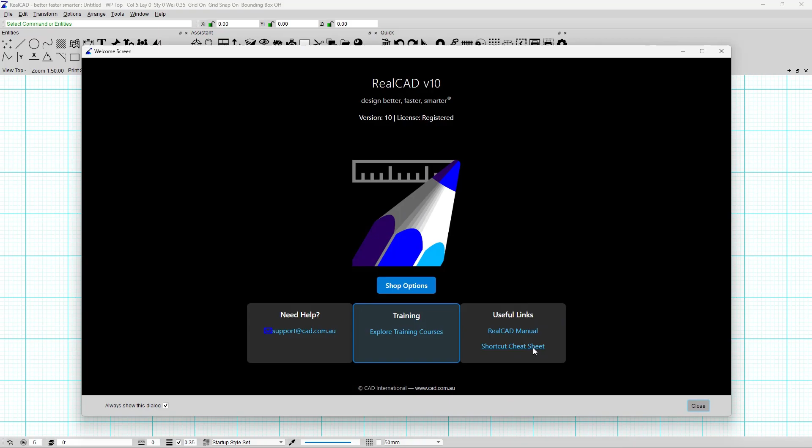Let's close this one and we'll open the full version of RealCAD here. When we do, we still get the same splash screen, the same manual and shortcut cheat sheet options, but we now have more menu items to choose from.

The menu down the left-hand side is now across the top, and we have what are called the parent and child menu systems. For instance, if I wish to draw circles, I select from the parent row across the top the circle commands, and underneath in the child row I have all of the ways I can activate or draw circles.

The same would be true for curves, for hatch patterns and planes, and for text. Exactly the same idea behind each one: click on the parent, it activates the child row underneath for you to select your chosen command from. And with all of these, the menus are grouped.

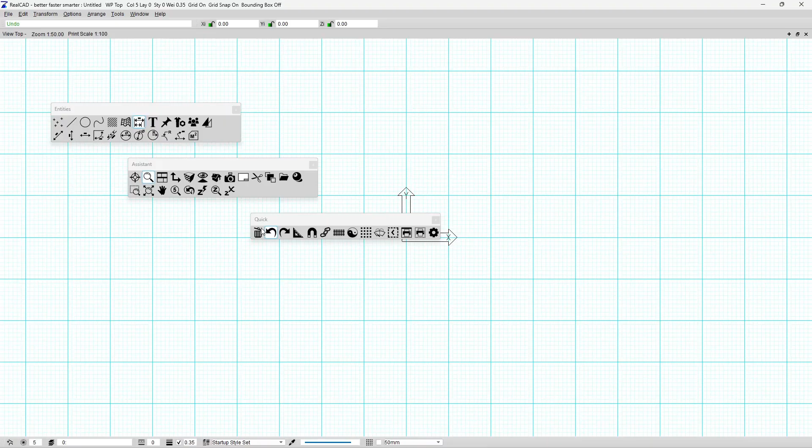There is the entities menu, there is the assistant menu, and there is the quick menu. All of these can be relocated, if desired, into a new location on the screen.

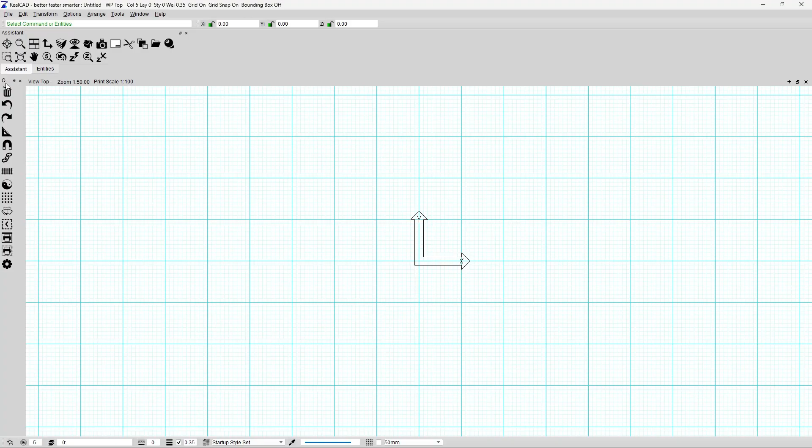You can also stack them. For instance, I could place my entities menu at the top, let go, grab hold of my assistant and lay it on top, and so long as it's sitting nicely on top, it will layer itself over the top there. And then I'll choose this item and put it on top. We now have the quick menu, the assistant menu, and the entities menu all in the same location.

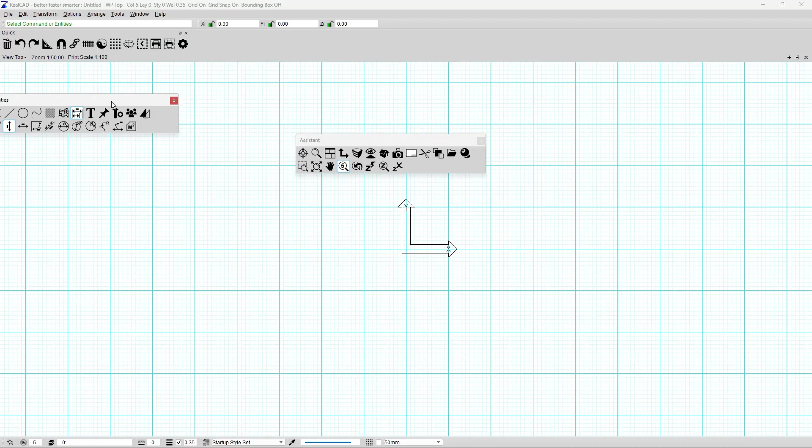We do, however, recommend that these be separated, and perhaps the way they come out of the box is the best way to operate them. So we'll put the entities menu right back on the left-hand side here, and I'll take the assistant menu and push it in between the two, and that is how it comes out of the box.

You will also notice at the bottom is our defaults menu. This menu allows you to see what your current color is, your current layer, your current line style, and your current line thickness is set up to be.

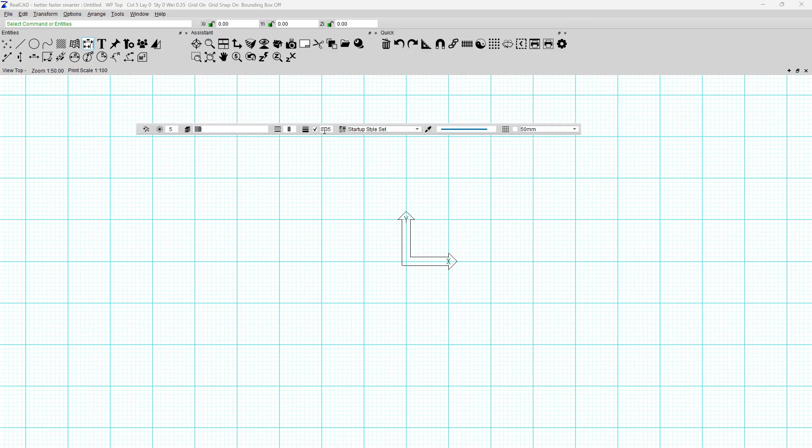It also is able to be maneuvered into a new location, so it could be sitting at the top here, as it is with the LT version of the software, or as we typically recommend, it can sit back down in the lower portion of your screen.

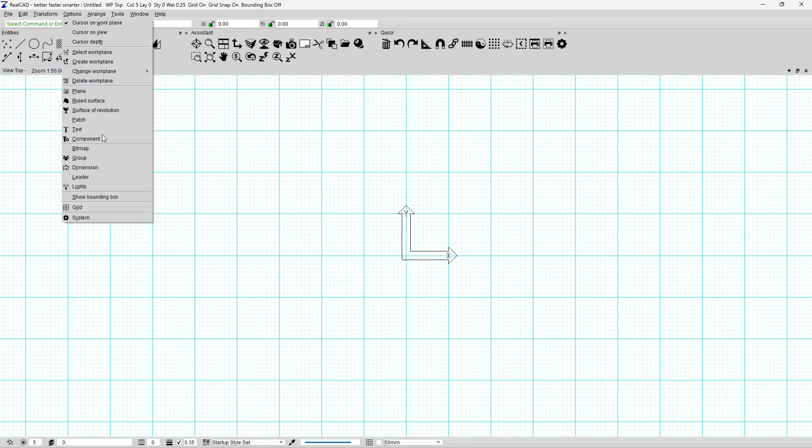In addition to the icon menus, you also have the text menus that drop down. Some of the commands that are not available in the icon menus are available in these menus, and some commands, for instance the arrange commands, are available in both.

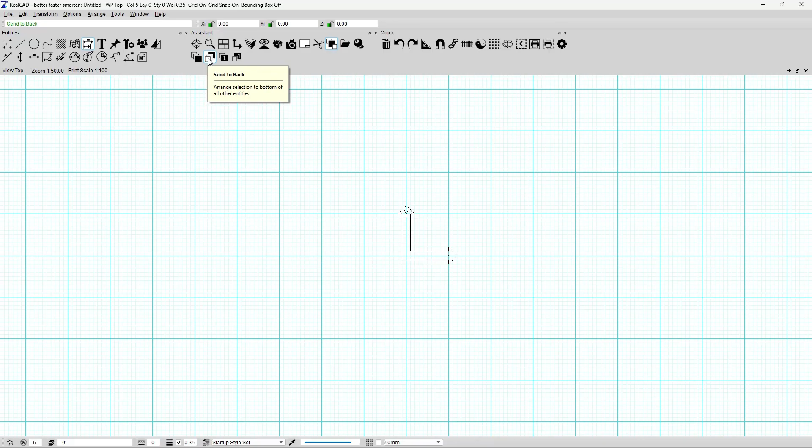You will see arrange to front, to back, forward one, back one, and you'll see exactly the same set of four commands under this icon here: to the front, to the back, forward one, and back one.

At the very top of your screen, you'll notice it shows you the application name, the catchphrase for that application, and the name of the current open file. You can only have a single file open at any one time, and this is the file name. If it says untitled, then no file has been saved.

It also displays the status of the work plane, which is the XY indicator here. It also shows us the status of which color, what layer, what line style, and what line weight are currently active, and those items are also shown just down here: color 5, layer 0, style 0, and a 0.35 line weight.

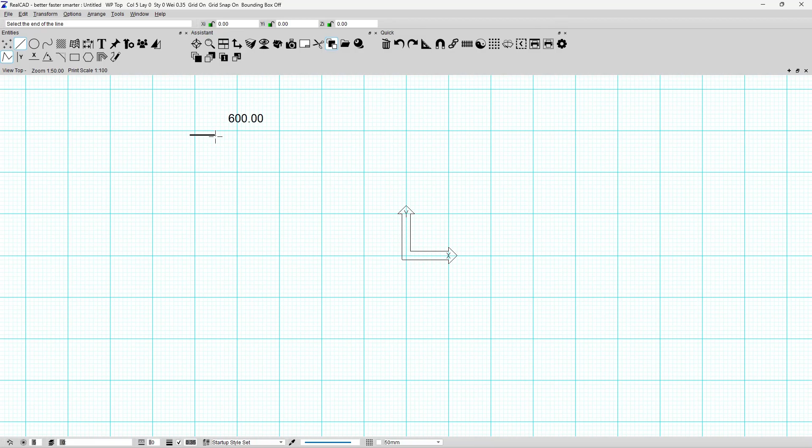It also displays whether the grid is on and whether snapping to the grid is also on. You can see here that the grid is on, and if we were to draw, you would be able to see that it is snapping to the grid points as we move around the screen.

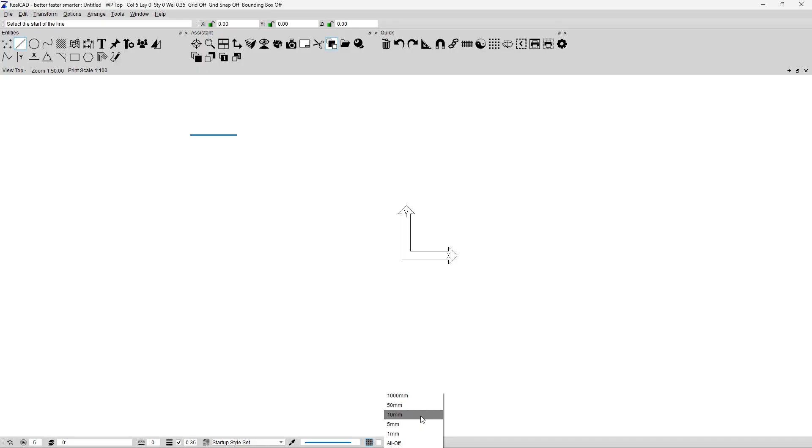You can switch the grid on or off using the grid tools in the quick menu. This is where you switch the grid snapping off, switch the display of the grid off, and select OK. The same option is available at the bottom menu, which opens the same dialog box. Both allow you to select a preset for your grid, and choosing that preset instantly switches on the size, color, and style of grid you wish to operate under.

Right here is one of the most important areas of your software, known as the prompt. It too can be moved. It basically tells you what the software is expecting you to do, and especially as a beginner, by looking here you'll be able to determine what you should probably be doing next.

Normally this prompt area sits at the top left, and it changes as you work through the software. So as I'm hovering over the circle, for instance, it's telling me I'd be selecting circles, arcs, and ellipses.

If I'm hovering over the curve command, it shows me that it's going to be selecting curves, and so on. Once I've selected a command, such as insert a line, it prompts me at the top.

It says select the start of the line, so I choose to select the start of the line. Then at each stage, it tells me what the next expectation is, and here it says select the end of the line, which I do.

It keeps asking me to select the end of the line. Eventually, when I've finished doing what I want to do, I right mouse click to step back once, but it's still expecting me to continue drawing lines.

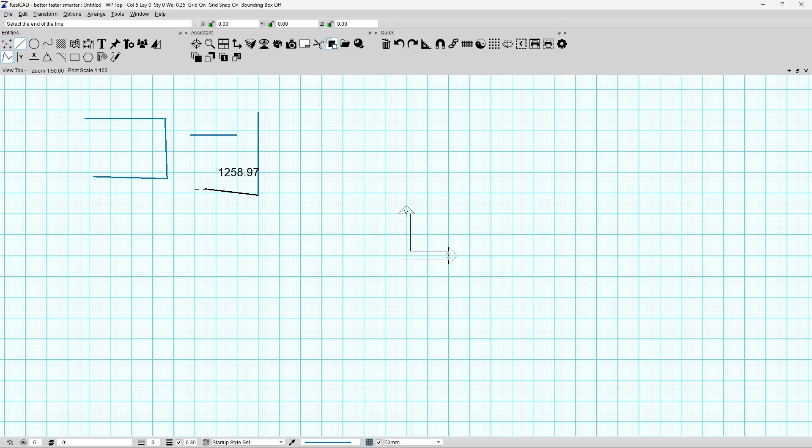If I right click twice, once and then again, the prompt will change color and go green, and it will basically say you have no commands selected at this point.

It says please select a command or select some entities. So keep an eye on this. This is probably your best friend when you are learning to use the software.

To the right is the coordinates bar. Again, it's a separate floatable, dockable menu, where you enter values in the X direction, left and right, the Y direction, up and down, and if you're working in 3D, the Z direction, which would be towards you or further away from you.

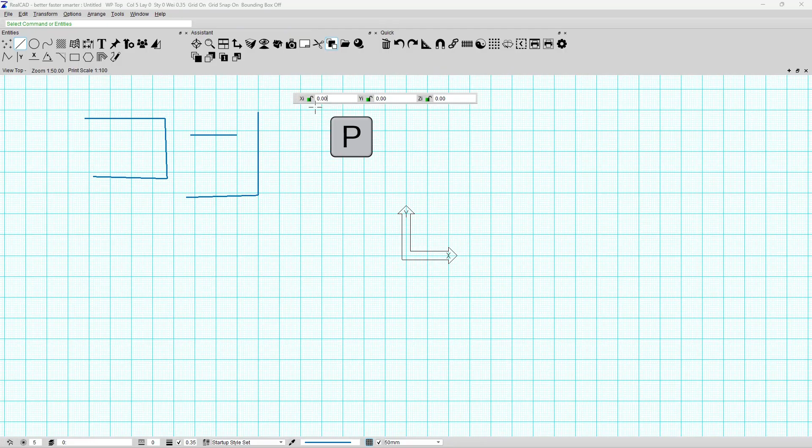Items such as the padlock can be clicked on and locked into position, locking the value you've typed in, or unlocked. Simply pressing P on the keyboard also locks or unlocks. If we were in the Y coordinate section and I pressed P again, it would lock or unlock whatever value I had typed in there, and so on.

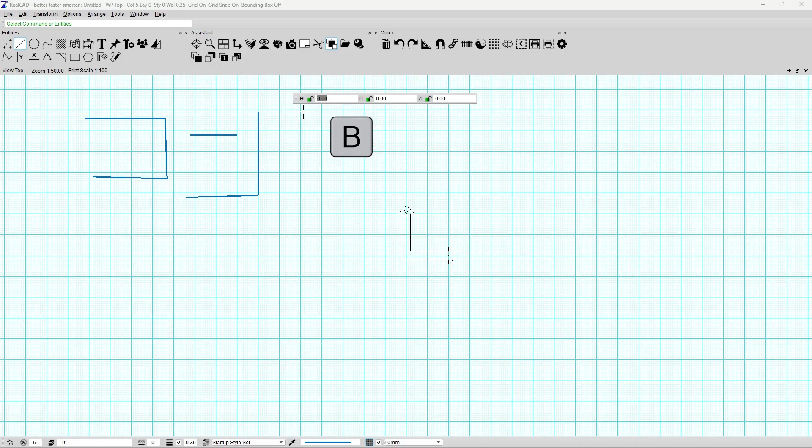You'll note that this menu also changes. Should I wish to be drawing in bearing and length, I simply press B on my keyboard, and this changes from the X, Y, and Z values to the B for bearing and L for length option.

If I select A for angle, it gives me both distance and angle as an option. And if I use the slash key on my keyboard, the slash option allows me to actually type in a length value whilst I'm drawing.

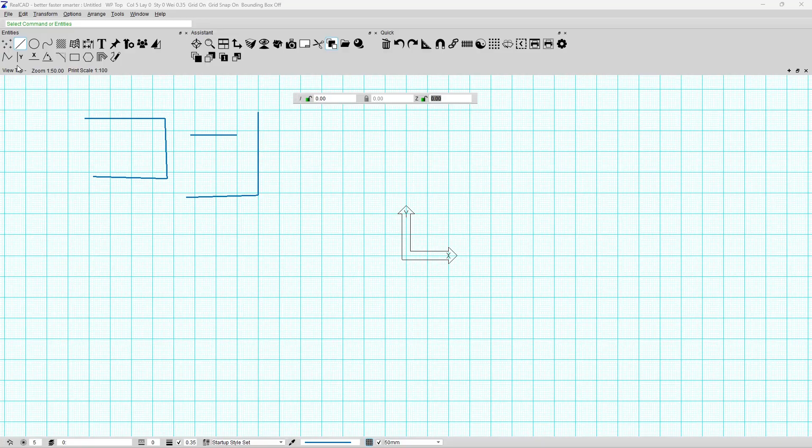So should I be clicking here and here, I can hit the slash, enter in a value, let's say 500, and then as I'm drawing, that line is locked to being only 500 long, no matter where I go.

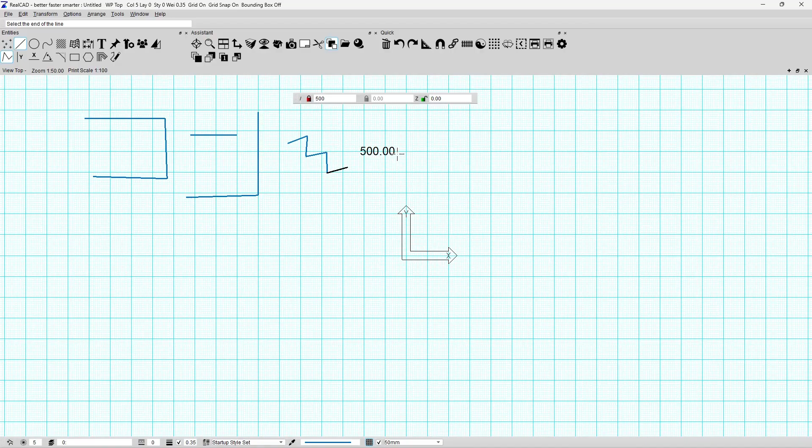So you can see the menus are important, and knowing where items are will be one of the greatest challenges over a period of time, because there are a lot of commands to choose from. Not all of them that you will use.

However, it's an excellent idea to become as familiar as possible with as many menu items as you can. I've just pressed P there in order to unlock that particular option.

Down the bottom, for some of these menus, a dialog box may appear. For instance, if I select the color wheel on the Change General Properties menu, another menu appears allowing me to select and change and edit the color scheme that I'm using.

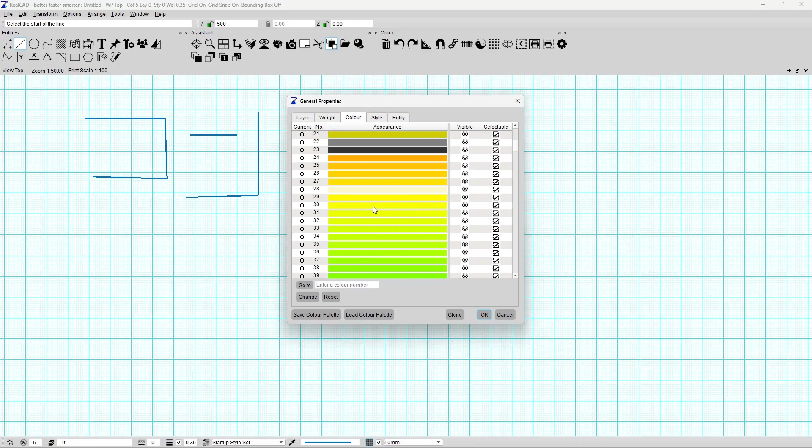I can also choose line styles, line thicknesses or weights, and layers. This is all done within the one dialog box, but it can be selected by choosing any one of these icons here. General Properties opens up the weights, but the others are still available to you.

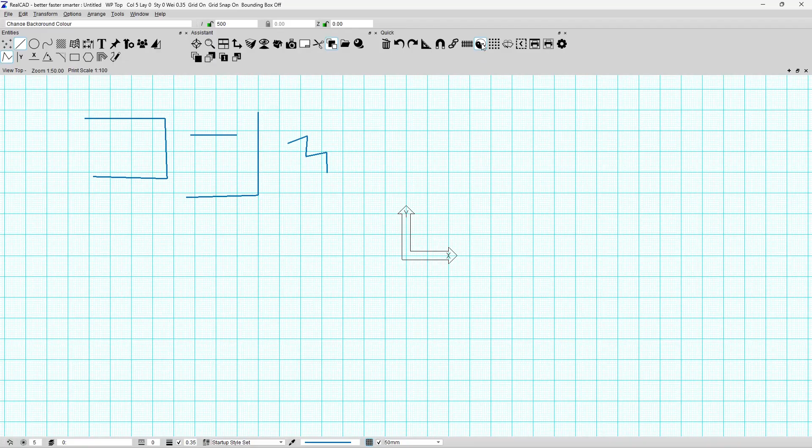The background color can be whatever color you choose. To change it, select the Yin Yang option, which is basically the change background color icon. From here, you can choose one of three tabs. You can either grab a color from anywhere on this palette to become your background, or choose a black and white series.

If you go completely black and hit apply, it will show you what it looks like. With this particular colored grid, it's not very easy to see the line work, so be careful about which colors you choose. Most people choose white or a very light color because it's most similar to a piece of paper on which your drawing may eventually be printed. Traditionally, however, black was the preferred background because it was easier on the eye and it allowed most colors to appear vivid when used.

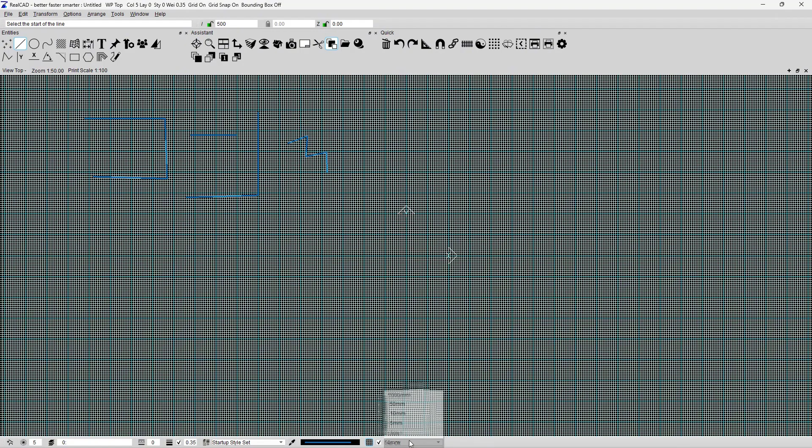So if we choose black and then switch the grid off, you can see that these colors look simply bright and easy to read. But as I mentioned before, it's easier to recognize how it's going to print by picking perhaps the pale gray or white and applying that instead.

The work plane indicates what's called the absolute 0 point. Absolute 0 starts where the X and Y come together. Let's try drawing a line again, and you'll notice my cursor has changed very slightly from being just a crosshair to having a round circle. If I then click at that location, I know for a fact that I have landed at the absolute 0 point.

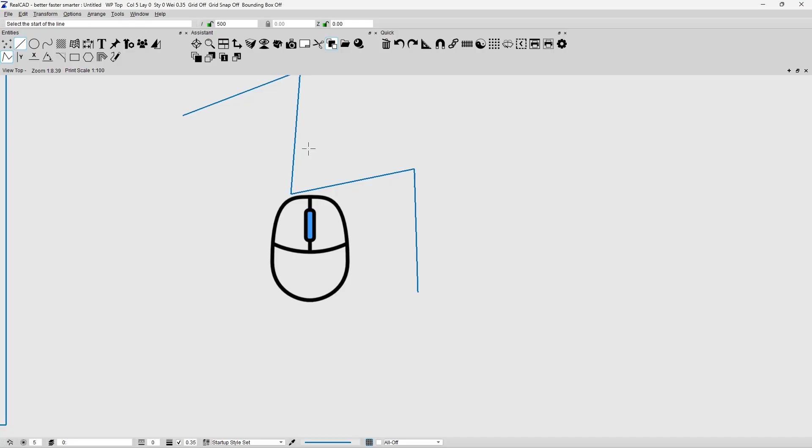Zooming works based on where your mouse cursor happens to be. So if I want to zoom in on these wiggly lines, I should place my cursor close to them and roll my mouse wheel either towards me or away from me in order to zoom out or in.

If I wish to move the entire screen to the left, I press down on my mouse wheel and drag the whole screen across to the left. If I wish it to go to the right, I just drag my mouse to the right, and so on. If I let go of the depression on the mouse wheel button, then I'm moving my cursor independent of the scene on which I'm drawing.

You can change a variety of settings using the settings tool here, under the system options. This is where you could, for instance, if you find it difficult to zoom in and out with the roll of the mouse because it's going the wrong direction for you, click this option to reverse the mouse wheel for zooming. I do recommend, if you're operating under version 10 or later, that you check this option, and you also potentially check this option, but we will explore that in a future video.

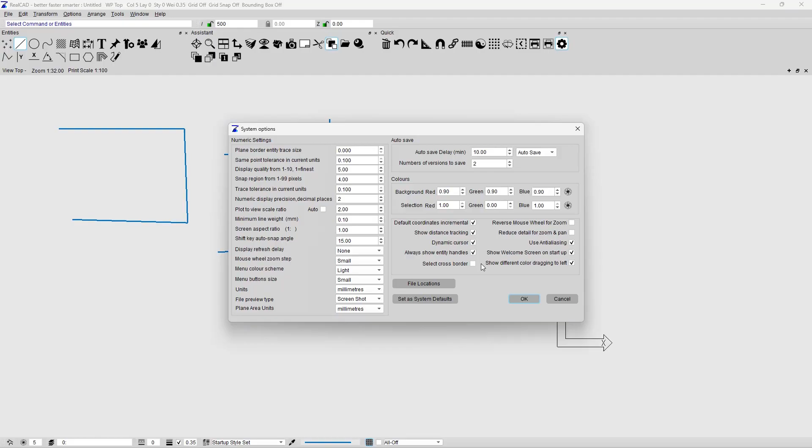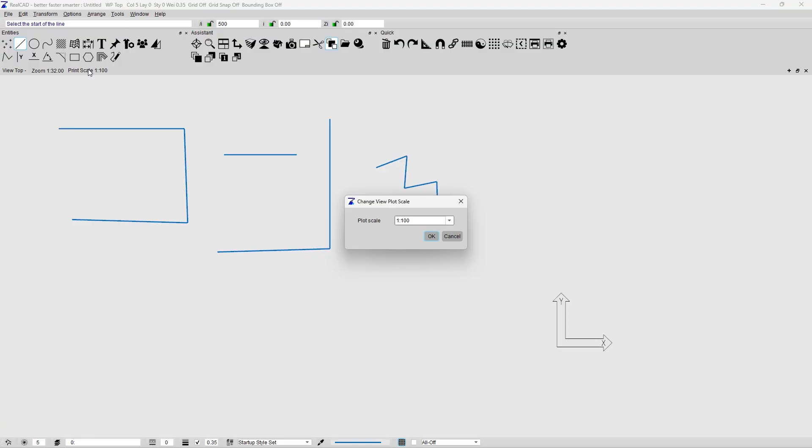In addition to what we've already seen as part of our menu system for the graphical user interface, we also have some discrete buttons here. This not only displays what the current scale is set to, but if I select it, it allows me to actually change the print or plot scale. I can use a drop-down menu to choose what I want to turn it to, or I can actually type a value in, and so on.

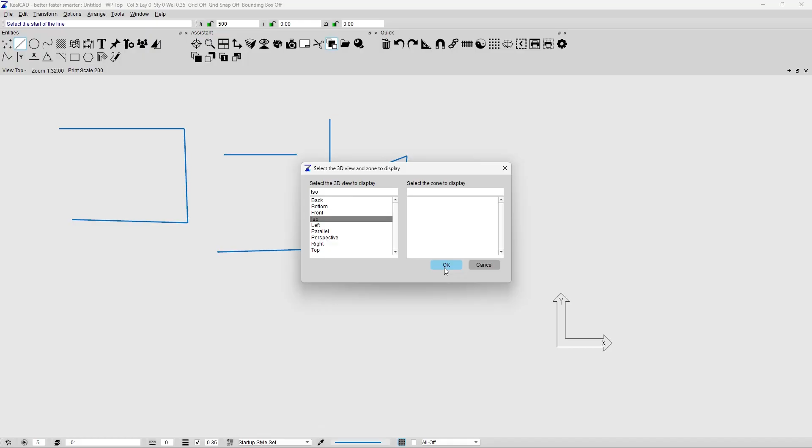I can also choose a different view. So here I'm in the top view, and if I select it, I could, for instance, select an isometric view, and you are now looking at exactly the same information, but from a different viewpoint.

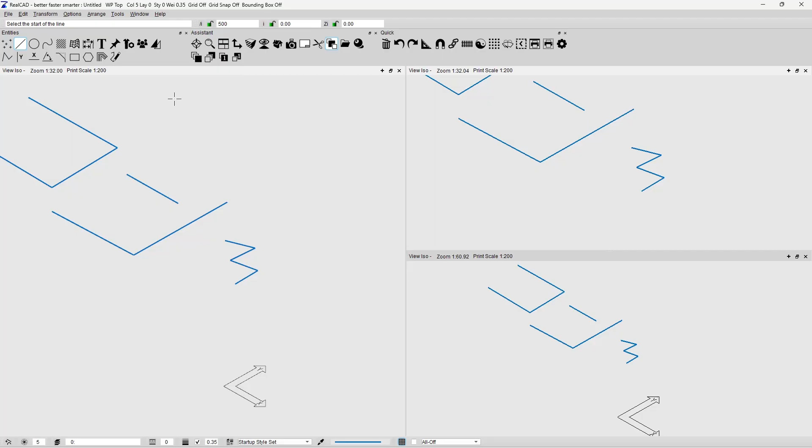You can, of course, also split the screen. In the upper right corner, we can add either a vertical split or a horizontal split. By choosing to split the screen, we can see multiple views at the same time. For instance, I could select this and choose the top view. Now I'm looking at this from above. This one I'll leave as isometric, and this one I'll also choose the top view, and select OK.

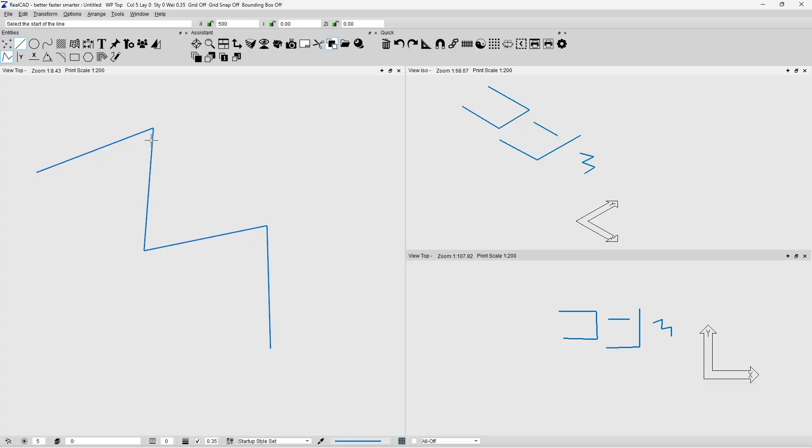This allows me to perhaps see the overview, but in this top view I could be working on a detail. So I might be working here, drawing lines, snapping to this point, and I can see what I'm doing down here, and in all the views. They're all interactive with each other. But here at least I'm getting a full overview.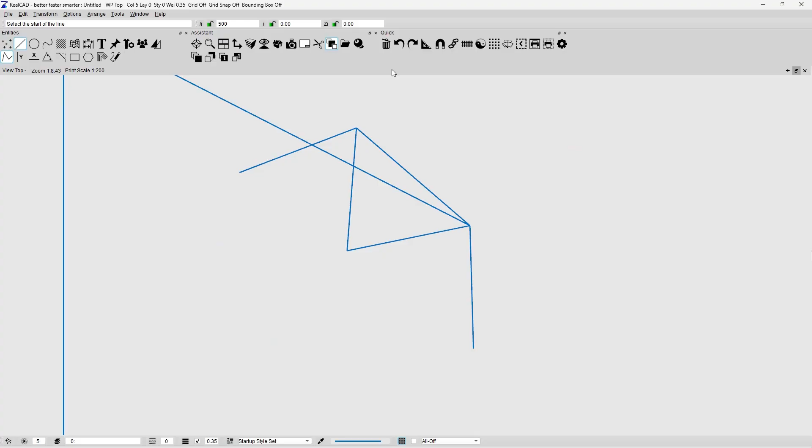When you have a split screen, you can maximize any one of those screens by selecting this button here, or by double-clicking on the area at the top of the view, and it will switch between being a full screen or a tiled view.

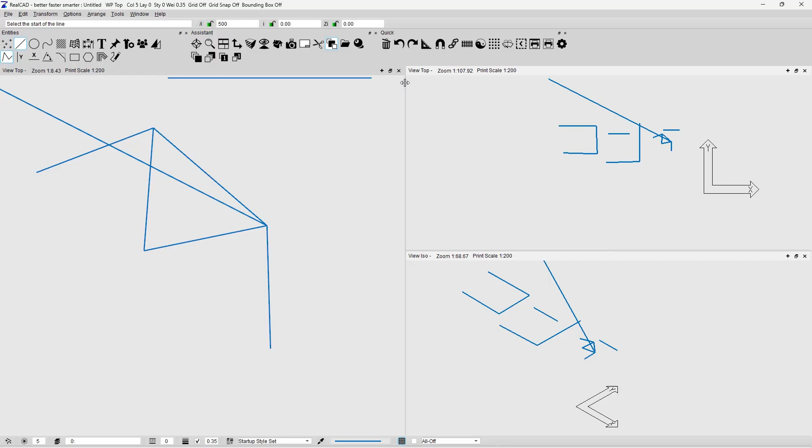So here we'll split horizontally, but only display one. Then if I hit the tile option here, it will split me back into two tiles or two windows.

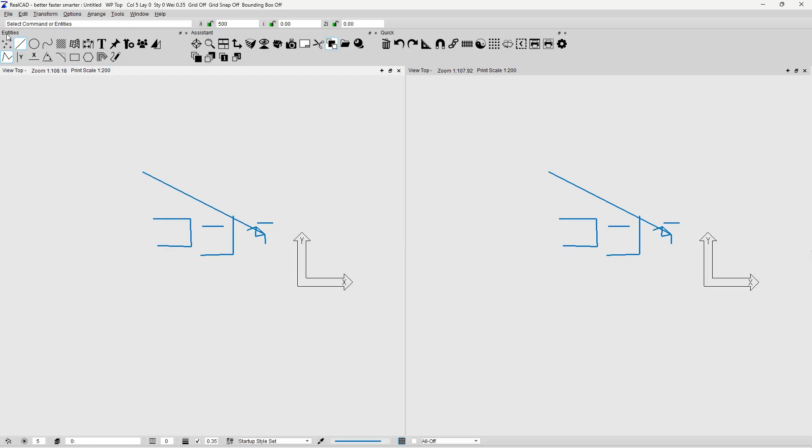If you have lost one of these menus, or you've mucked the menus up somehow for whatever reason, simply select Window, Toolbars, and reset the toolbars, and it will set it back to the factory defaults.